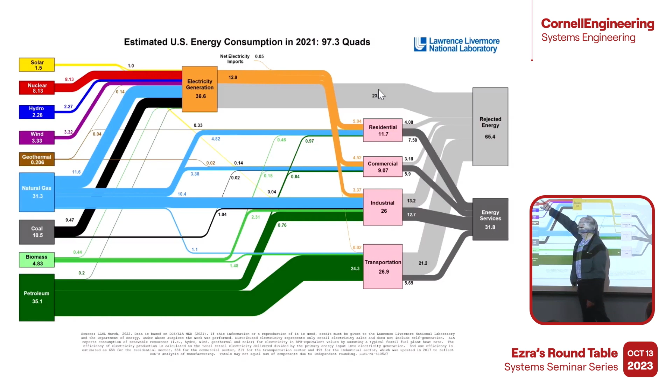These are decarbonized energy sources: solar, nuclear, hydro, wind, geothermal. These are carbon intensive, with coal and petroleum being the most carbon intensive energy forms. This is where energy is used on the right-hand side: transportation, industry, commercial, residential. These are energy services that are useful. This is rejected energy. And you can see the comparison. 2/3 roughly of all energy is rejected.

Why? Because we have coal and natural gas-fired power plants that put out an enormous amount of heat to the atmosphere. And then we have internal combustion engines in transportation that put out enormous amounts of energy to the environment. So in terms of decarbonization of transportation, I'll draw your attention to this little thing here, the 0.02, which is the electrical energy generation that's used in transportation.

What we have to do is we have to take this number and make it match that number. We have to increase that number to that point there, right? Not only that, but we can't have any of that power coming from natural gas or coal. It has to come from these 5 here, right? Decarbonized power. Geothermal is small and emerging.

Nuclear, we're not going to permit another nuclear plant. It takes 25 years to do so. Hydro, we're not going to build another large dam in the United States for environmental reasons. So it has to come from wind and solar. So wind and solar need to increase in order to match this number at a bare minimum. That's the decarbonization challenge that faces transportation and the decarbonization challenge that faces our country.

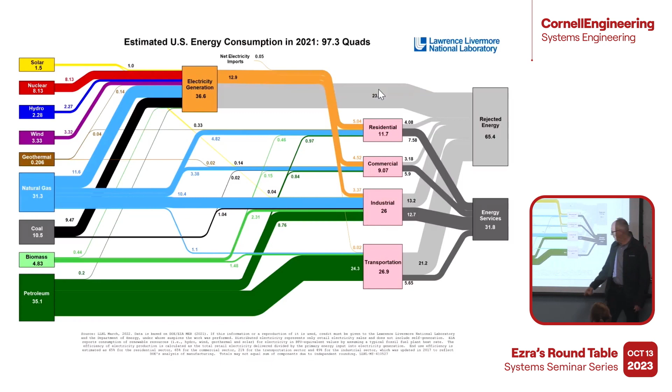Are you beginning to see the scale and the scope of this transformation that's hitting us? Then I glibly said wind and solar, right? Wind and solar are intermittent, whereas our use of power here is not intermittent. We drive all hours of the day and night. So we're going to need grid level storage.

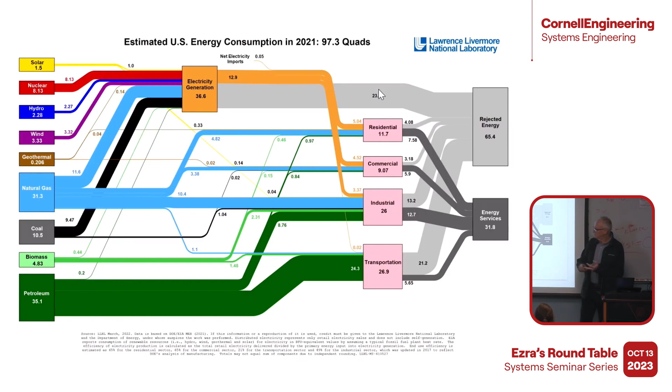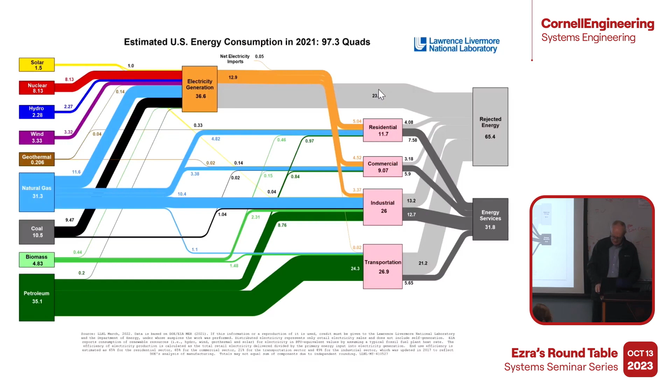So we need increase in renewable energy generation, increase in grid level storage, increase in transmission and distribution, increase in recharging. And then of course we need to produce the vehicles themselves and the batteries that power them. And then we need to make sure that people implement these. So we need to provide incentives for people to purchase. And I'll talk more about that in a while.

But our road transportation reality in the United States: light duty is LD, medium duty MD, heavy duty HD. We collectively drive in the United States 101,000 miles per second, 24 hours a day, 365 days a year. Fuel consumption: a large gasoline tanker that you see refueling a gas station, one of those every 1.5 seconds of every hour of every day of the year.

Number of vehicles in the United States, 270 million of them. They average about 12 years old for light duty. We used to sell about 17 million new light duty vehicles a year. It dropped significantly in the pandemic. It's climbing back up to there. Heavy duty sales are half a million or so. Average new light duty vehicle price in 2023 is $48,000.

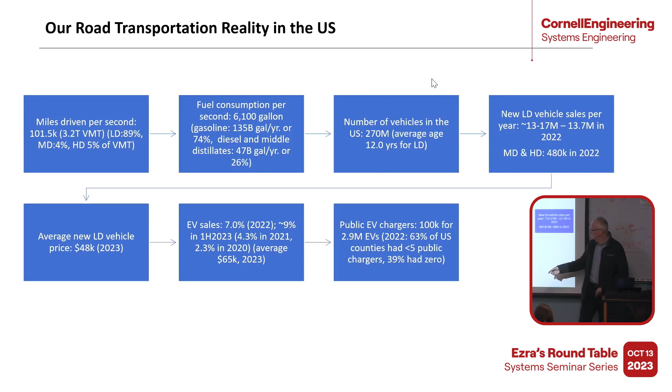EV sales are 7.9%. I said of the order of 9%, it's 7.9% so far this year. The average EV price is substantially higher than the average new light duty vehicle price, by $17,000 or so. 39% of US counties have 0 public chargers for EVs, which means that people charge them themselves in their own garages or in private charging. But this is a significant impediment to the rollout of vehicles.

So, by 2050, the vast majority of the light duty automotive fleet, and by light duty we mean passenger cars, SUVs, light trucks, minivans, the sorts of things that you and I drive around in, and the vast majority of those are privately owned, will be electrified if we've resolved the issues of critical materials and minerals. I'll talk more about that in a while. If the grid is essentially decarbonized through renewables, if vehicle purchase costs have been reduced, and if EV charging opportunities are ubiquitous, meaning you can charge at home, but if you go beyond the normal vehicle range on your EV, you need to be able to find recharging capabilities.

This is just another graphic which says exactly the same thing, but it stresses the fact that we need to resolve these things simultaneously. Significant build-out of renewable energy, significant build-out of the grid. And by the grid, we mean the first 1,000 miles, so the very large, high-voltage towers that you see with lines strung between them, and the last 100 feet, meaning if you live in a house or a dorm or a building such as this, they might need to add electrical power capability in order to improve the capability to charge EVs.

Critical materials and components. And those are battery materials, things like lithium, cobalt, graphite, manganese, nickel, a number of others. Rare earths, which are used for electric machines, specifically things like permanent magnets and so on. And then still semiconductors. And those are both for microprocessors, but also for switching for power, both at the millivolt level for your laptop, but also at the thousands of volt level for the grid.

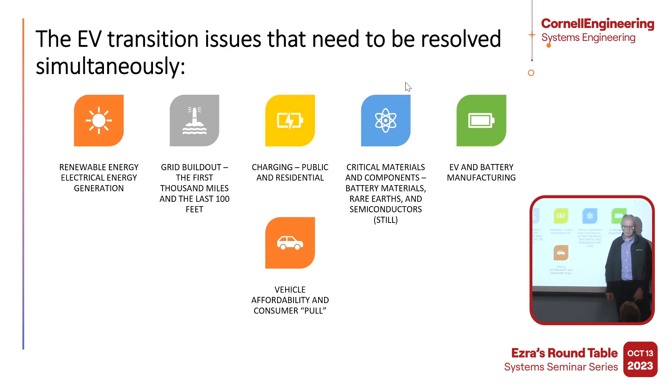We're doing an absolutely terrible job of that. We're doing a not very good job of that. We haven't really started that. We haven't really started that. And then this, vehicle affordability, is a significant problem too. And this pretty much says in words what I've just shown, but for transportation electrification, we need a 3x, 3 times increase in the current solar and wind capability. And that's before we decarbonize industry and before we decarbonize residential heating and cooling, for example.

So you've heard a lot about the proliferation of heat pumps for heating and cooling. A remarkable technology, very efficient, coefficient of performance of 3.5, which means for every 1 unit of electrical energy you put in, you get the benefits of 3.5 units of heating or cooling. A remarkable technology. But before we can do that and electrify, take away someone's natural gas fired furnace, for example, we will need to increase renewable energy generation.

And a near doubling of the existing high voltage grid, and a 100 times increase in EV charging, 100x increase in EV charging for light duty, medium duty, and heavy duty. We need a complete transformation of the automotive industry, and this is underway. A complete revamp of critical materials supply. That's problematic. We can source lithium in the United States. There's lithium in geothermal brines. There's a big lithium deposit we found on the border of Nevada and Oregon.

But none of that beneficiation, taking the raw ore and producing lithium carbonate or lithium hydroxide for lithium batteries, none of that takes place in the United States. And it would be very difficult to permit in the United States. Why? Because they are, by their very definition, dirty processes.

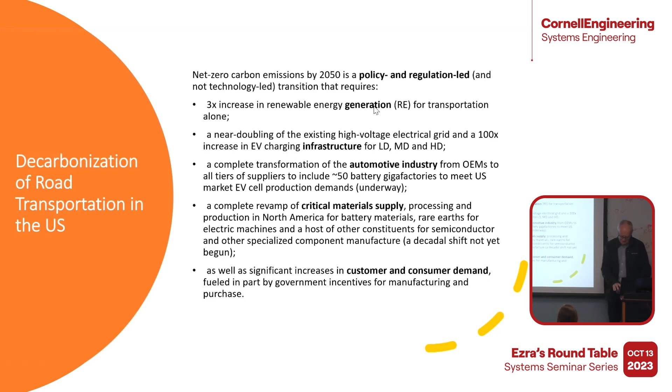As well as we need significant increases in customer and consumer demand. This is something that we can't understress. We're talking about mechanisms and systems and technologies and processes and procedures and materials, but there's humans involved, right? And we need to keep thinking of that, human factors and human behavior. Each of these 5 revolutions is underway, proceeding at different rates, different levels of finance required.

Basically, the bottom line is we're at the beginning of a decades-long transition with respect to the electrification of the automotive fleet and the electrification of transportation. And it's highly uncertain in nature, and it's going to cost us trillions of dollars, trillions, meaning thousands of billions of dollars in the aggregate.

To electrify all vehicle miles traveled in the United States would add about 43% to US annual electrical energy demand, right? It's doable, but again, this is a graphic representation of the challenge. It cannot come from petroleum, it cannot come from natural gas, it cannot come from coal, it cannot come from nuclear, and it cannot come from hydro. It has to come from that. So that area has to expand to 100% of available energy requirements in the United States. You're beginning to see the challenge of this transformation. That's just on the energy production or generation side of things.

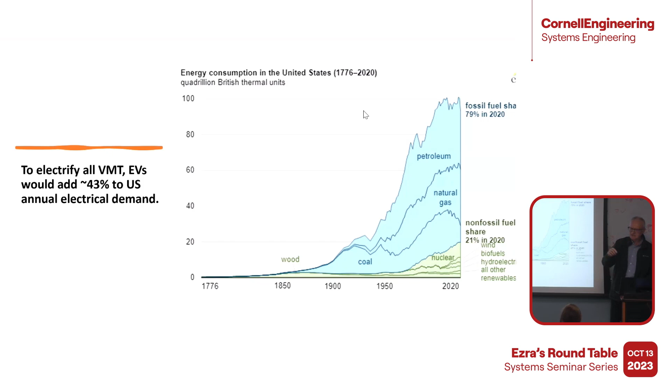In 2018, 2019, a complete irony is we achieved energy independence in the United States. We've been fighting for it for 70 years or so. We achieved it. And virtually at the time that we achieved it, we decided to jump architectures of vehicles away from fossil fuel driven vehicles to electric vehicles.

Now the beauty of using electrical energy as your energy source is that by definition, because we are a continent essentially, the United States, we'd be largely free from imports. Although bear in mind, we do import natural gas and petroleum from both Canada and Mexico. There's flows back and forth across the boundaries. But if you're going to use electrical energy, that sort of by definition means that you're producing your own power along the way. But again, there's this notion of trading energy independence for complete dependence on others for critical materials, the critical materials that are required to undertake this transition.

New vehicle economics. We used to sell about 17 million vehicles a year. This dates back to 2014 or so. Then we had the pandemic, a significant drop to a little over 8 million on an annualized basis by quarter. And we're now up to 13 or 14 million, right? We haven't recovered to 17 million. Why? Affordability is an issue. And then there's the availability, as you know, of semiconductors.

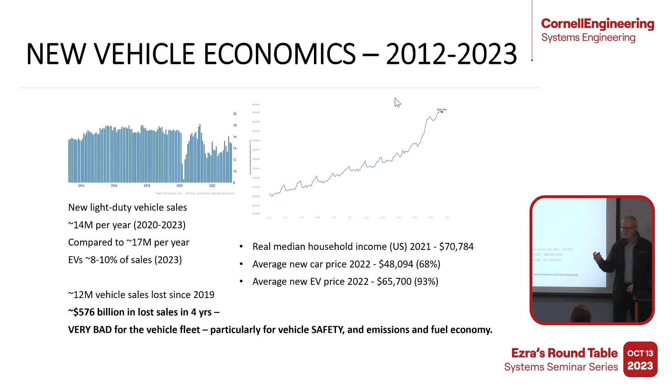So in other words, the vehicle fleet, if you differentiate it into a bimodal of horrible old vehicles and beautiful new vehicles that are very expensive, on average, the vehicle fleet becomes less safe, higher emitting, and less fuel efficient. And none of those things are good.

Now, in terms of the critical materials, this is from the International Energy Agency, and this is a sustainable development scenario of 2040 compared to 2020. This is actually outdated. It's 2021. It's 2 years old, but it doesn't matter. For the purposes of what I'm about to say, it describes it. And it says, for example, for lithium, we need to increase both lithium mining and lithium production by a factor of 42. 42.

Graphite, why? Because graphite is used extensively in batteries, by a factor of 25, cobalt by 21, nickel by 19, rare earths by a factor of 7. These are multiples of 7. We need to scale up our mining industry today, our extraction industries today, and the beneficiation or processing of those raw materials by these factors for these critical materials.

And why are these the ones that are chosen? Because these are the ones that are required for electrification. Lithium, graphite, cobalt, and nickel in batteries, rare earths in electrical machines, generators and motors and actuators and so on. These are the levels at which we need to increase this, right? And the idea is this is 2040 relative to 2020, within 20 years. So these are staggering amounts.

Bear in mind further that mining, we collectively, as a very developed nation, we've avoided mining. We've given that job to other people to do. We haven't wanted to do it. It's a dirty business. Literally, it's a dirty business. And we've stepped away from it. Now we have to re-embrace it, right? So things are going to change. Things are going to change radically.

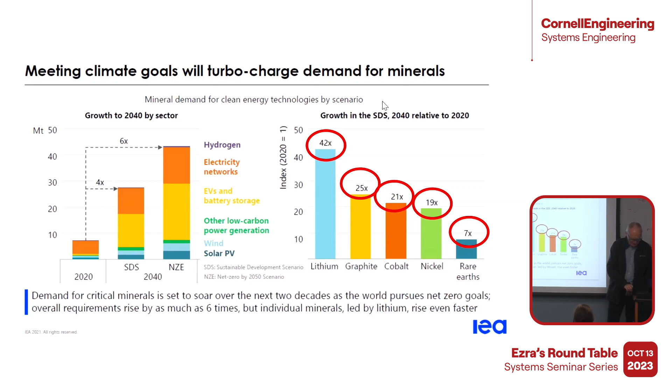Battery pack costs: the idea was that battery pack costs would just decrease significantly over time. And this is dollars per kilowatt hour at the pack level, 2022. And unfortunately, you can see what people predicted, which is that they would go to $50 per kilowatt hour at the pack level. No, there's been a reversal. Costs have actually increased in recent years. And a lot of that has to do with the costs of the underlying fundamental raw materials. So the lithium, the cobalt, the nickel, the manganese, and so on.

Right. So 100 kilowatt hour, which is a large battery pack for a light duty vehicle, but that's $15,000. And that's just the raw cost of it. In a $65,000 vehicle, that's 25% of the cost merely going into the battery alone.

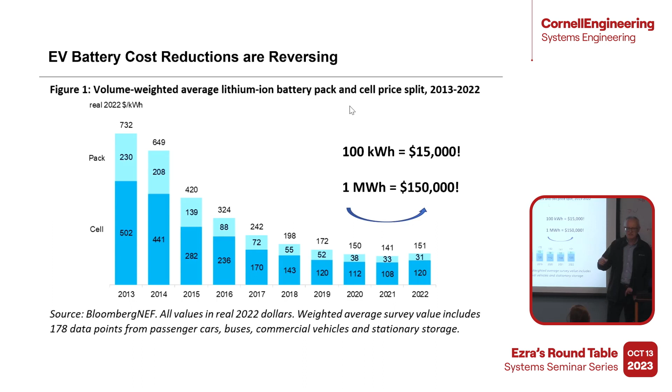Significant issues. Refueling or recharging rates, you might have seen this before, but a light duty car, when you fill it up at the gasoline pump, 10 gallons a minute, it gives you 300 miles per minute of recharging capability, right? Level 2 charging at your home is 0.35 miles per minute. So it's a factor of 1,000 difference.

A heavy duty truck, when it pulls up to a truck stop and they put in the big filler, it's 180 miles per minute. An EV truck charging at 1 megawatt would be 5.5 miles per minute, right? As you know, heavy duty trucks, when they're not moving, they don't earn money. And that's what heavy duty trucks are supposed to do for our economy.

It's provide things we need, but also make money for the people operating them. And so that's a tremendous worry. And that's a 1 megawatt charger, right? So how many of you have owned or drive or have operated an EV? I know that Ricardo does.

Okay, but you're talking about a cable thicker than your arm for this 1 megawatt recharger on a heavy duty truck. And you've all driven on the interstate and seen a truck stop where there's been 50 or 100 or 200 or 300 trucks. Just think of those, or a truck stop, a rest area. Think of 300 trucks a night having to charge at a megawatt apiece. This is the scale and scope of the transformation.

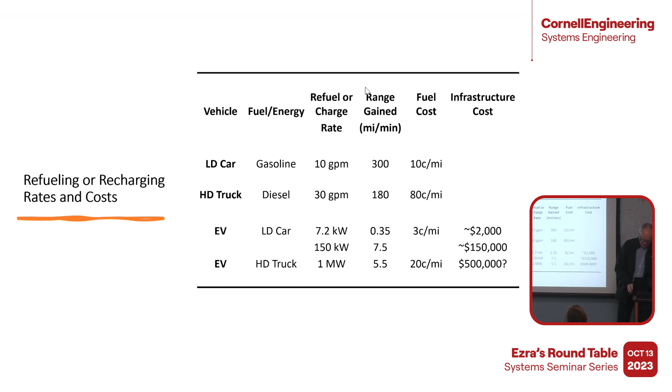Government interventions. I spoke of the sort of technology push, if you like, but there's a consumer pull. And we're doing a pretty good job of that. There's tax rebates for light duty vehicles, there's incentive to manufacturers, there's a much higher awareness of the critical materials and minerals supply chain problems in the US. There's a lot of reshoring of manufacturing and the reindustrialization of the United States. We need to move higher up the critical materials chain. As I said, we need to mine our own lithium and upgrade it and beneficiate it within the United States.

From a critical economic security point of view, we're funding the electric charging build-out. There's the US Department of Energy, US Department of Transportation Joint Office on Energy in Transportation. And they're doing things like, what is the optimum siting of recharging systems within a certain geographic area? We need standards. Why? Because industry loves standards, and that's in charging, that's in V2X communications, for example. And what about automation? I haven't spoken much about automation, except to say it's happening at pace, and it's a very, very difficult area, especially in the notion of a mixed vehicle fleet of humans and automated vehicles combined.

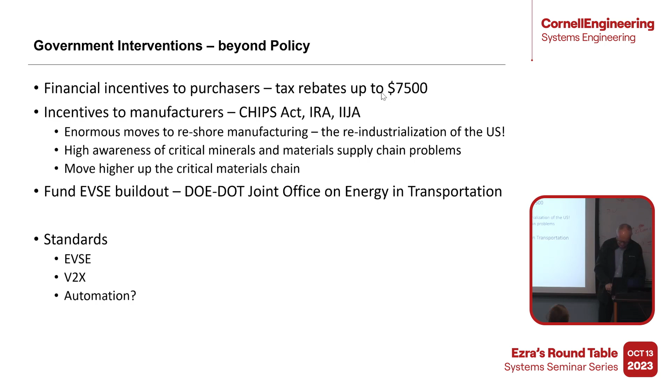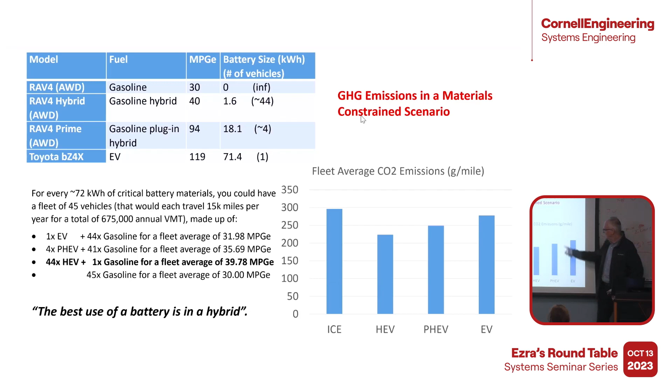Now, greenhouse gas emissions in a material constraint scenario. We are material constrained. Why? Because we can't scale up lithium production by a factor of 42, not easily. So it just turns out that if you think of an internal combustion engine vehicle, a hybrid electric vehicle, by which you mean a strong hybrid, much like the original Prius, for example, a plug-in hybrid which carries a battery pack as well, where the hybrid does not carry a battery pack, and then a full EV. The fleet average CO2 emissions in terms of gram per mile, based on the current United States power plant emissions as they exist today, the lowest greenhouse gas emissions, CO2 emissions, are not the EV, and they're certainly not the internal combustion engine vehicle, but they are a hybrid, and it's a regular hybrid. It's not a plug-in hybrid.

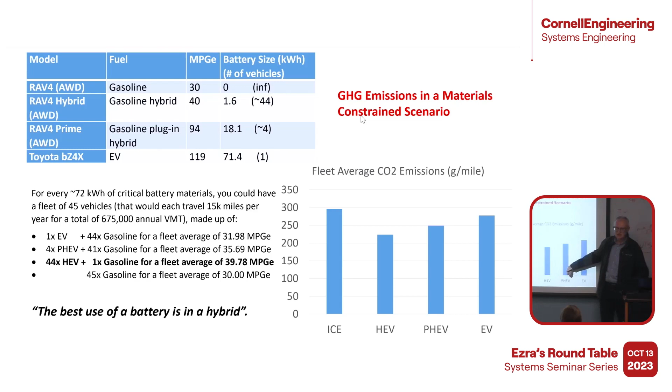So if we're truly worried about what if we had an incremental 1 ton, for example, of lithium, and you say to yourself, where should we spend that 1 ton in order to reduce our CO2 emissions? It's not in EVs, it's in hybrid electric vehicles. Now, at the point at which we're no longer materials constrained, and we have decarbonized the grid, and we have grid build out of the transmission and distribution, then of course we want to build these. But there is a transition that we've ignored. There is a transition that we should have undertaken that we've essentially ignored.

Again, I said to you early on, electrification, automation, and something else, connectivity. Can't remember what I said. I said those aren't the most important. The most important is safety. Right? Roughly 43,000 fatalities a year in the United States. That's both a scandal and a tragedy, and something that we collectively should do something about. You can see the number of fatalities. These are in recent years, and on the right-hand side, it's fatalities per 100 million miles traveled. I beg your pardon. And it's roughly 1.4 fatalities per 100 million miles traveled.

Now, admittedly, why is that? Because these are human drivers, by and large, and humans are both incredibly good drivers, I mean, look at Formula One drivers, for example, and they're incredibly bad drivers. I was telling everyone, I walked from the Statler Hotel down to Hollister Hall this morning, and someone drove through a red light, right? Happens all the time. You have to have your wits about you as a pedestrian. But these are things that are readily avoidable and shouldn't happen. These things simply should not happen. So it's human behavior and human factors that we have to take into account. And again, with respect to vehicle automation, we're going to have a mixed vehicle fleet.

We're going to have human drivers, we're going to have pedestrians on the roads, we're going to have cyclists on the roads, and we're going to have automated vehicles. And all of these issues have to be solved and resolved. But again, I wanted to draw your attention to the fact that these numbers are scandalous, and they're going to persist because we're going to have human drivers for the next 30 years. And this is something that we collectively should do something about.

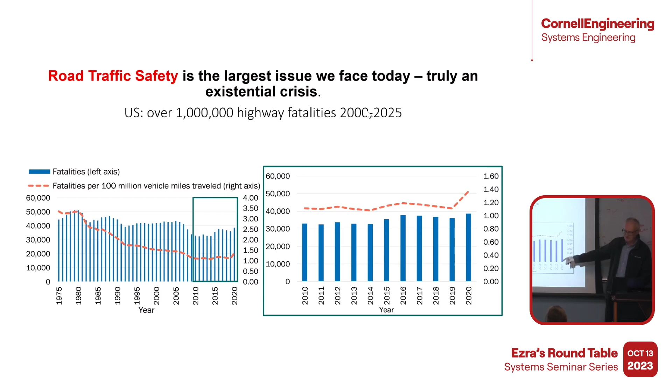I just picked up some pictures here. This is the Cruise vehicle that rear-ended a bus in San Francisco recently, and this is another Cruise vehicle where a truck was making a sharp left-hand turn and it simply drove into the side of it. So I'm not saying that humans don't do these. Humans do these sorts of things all day, every day. But it's just emblematic that automation is currently not a well-resolved issue and will remain difficult and intractable for some period of time to come.

It doesn't mean that people should stop working on it. To the contrary, you should double down your efforts. But you should bear in mind that it is a significant and serious issue. It's something that needs to be resolved.

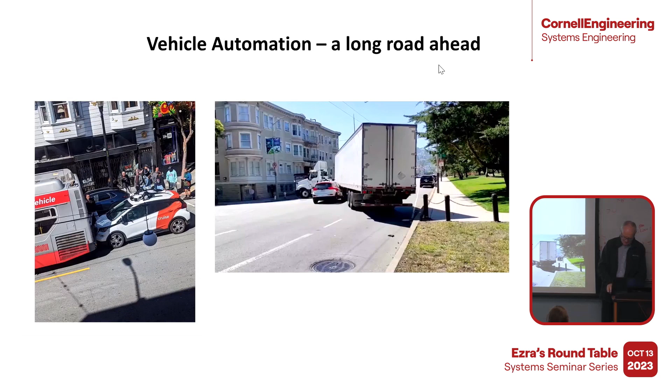Professor Malikopoulos spoke of the ARPA-E NEXTCAR program, and I had to include this slide out of pride because the idea there was to use low levels of automation. So there are levels of automation where the driver still needs to keep his or her hands on the wheel at all times, but it can control the vehicle speed, it can control the vehicle braking, and to a certain extent it can control lane keeping.

And the idea is that, well, this is demerging, Andreas. I guess it's not merging. I was going to say it's merging, but it's demerging.

The idea, here's a vehicle, a ghost vehicle that's changing lanes, for example. The idea is that, as Andreas said, you can have significant energy efficiency improvements to a single individual vehicle if you allow the machine to take over the low levels of automation and you get it to drive in a more sensible fashion than a human driver. And by significant, I'm meaning 20 or 30% improvements, which, as you know, are fairly remarkable.

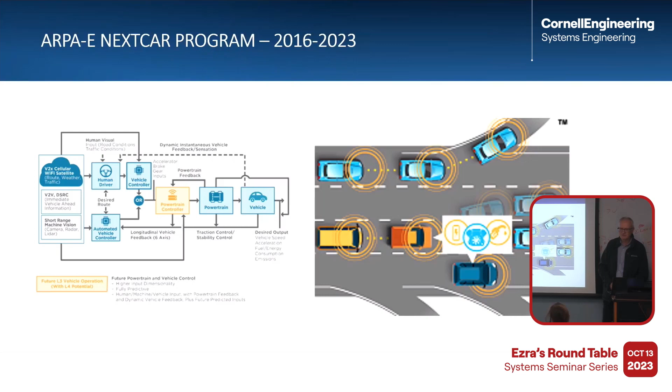Right. Separately, the US Department of Transportation, and I've mentioned to you that roadway safety is a critical issue. 27% of all roadway fatalities in the United States occur at a roadway intersection, right? And that's both signalized, meaning it has traffic lights and traffic signals, and non-signalized intersections. So of the 43,000 fatalities I spoke of earlier in 2021, roughly 10,000 of those occurred at intersections. And it's a combination of drivers and passengers in vehicles, but also pedestrians and cyclists, people pushing strollers, people in wheelchairs, and so on.

And so it occurred to the US Department of Transportation to say, look, if we have automated vehicles today that are driving the streets of San Francisco and Chandler, Arizona, and they use machine vision and perception with multiple modalities, they use sensor fusion, they use real-time onboard path planning to decide where to drive next, and real-time decision making. If we believe collectively as a society that those technologies are good enough for us to allow these vehicles to drive on our streets, and apparently we do believe that,

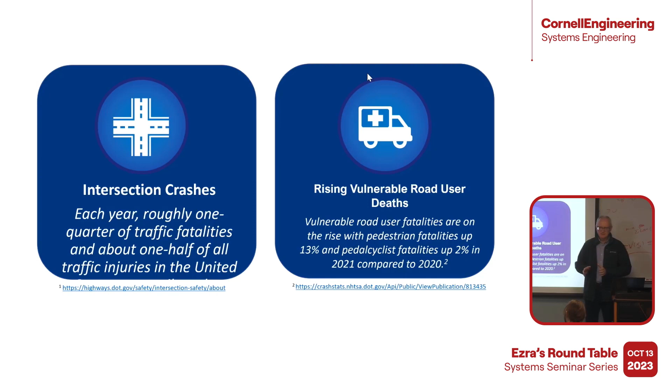then surely we can take those same technologies out of the vehicle and put them in an intersection and look down on an intersection, determine where the cars are traveling in real time, determine where the pedestrians are traveling in real time. I want to get a picture. There we go. Determine where the vehicles are moving in real time, determine where the pedestrians are walking in real time, and then alert them, respectively, if a collision or an incident is about to occur.

And that's the idea behind the US DOT intersection safety system, is to use emerging low-cost machine vision sensors, sensor fusion, real-time data analytics to improve situational awareness and to anticipate safety threats. The idea, therefore, is to go one step beyond that and to alert people in real time that a potential incident may occur.

And again, why am I bringing this to your attention? Because it combines the notions of automation. To a certain extent, it introduces the notion of efficiency. Why? Because intersections with traffic stopping and starting are a major source of inefficiency in our driving system. But most importantly, it introduces the notion of safety. And it's something that we can do today. That's the important part. This is not something that will take decades to emerge.

This is something that we can start working on immediately today, and hopefully within 5 to 10 years, come up with one or more commercial systems that can be implemented in intersections to drop that number significantly, the 10,000 fatalities, drop it significantly. Why? Because again, it's an imperative that we do something. We can't simply say in 50 years we'll have a fully automated traffic system, pedestrians will be removed from roads, human drivers will be removed, everything will be safe and wonderful. No, we need to do something today.

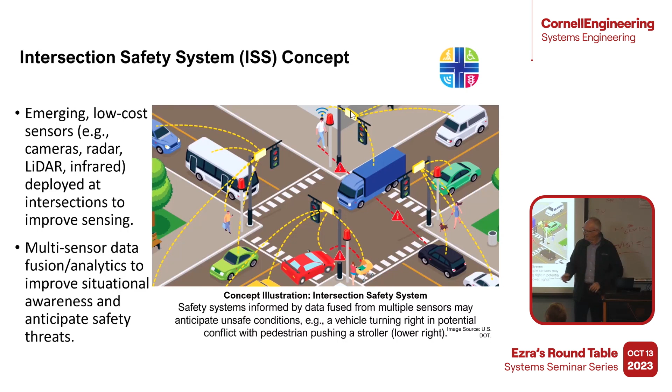And this is an attempt to do that. It's a technology-based approach. There's a prize competition. The stage 1A closed recently, but there'll be provision for people to join the second stage, which will probably kick off next year.

And the second stage is developing, training, and improving algorithms for the detection, localization, and classification of vulnerable road users. A vulnerable road user is a pedestrian, a cyclist, a person in a wheelchair, a person on an e-scooter, skateboard, people pushing a stroller, so on and so forth, using DOT-supplied sensor data collected at a controlled intersection. And it's currently a $6 million prize-based challenge.

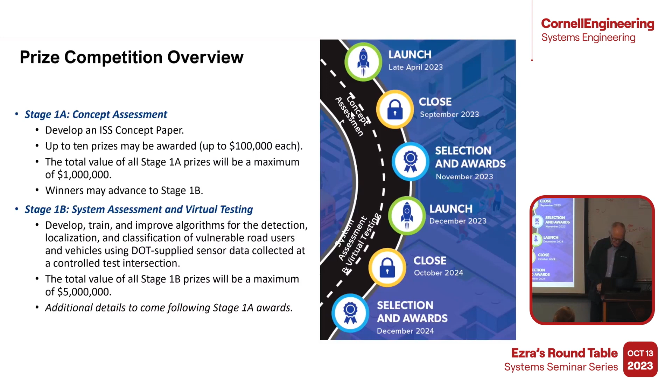And I mention it to you because Professor Malikopoulos spoke of the ARPA-E NEXTCAR, which I worked on a number of years ago. And this sort of is a progression of that, but distinctly with a safety flavor. The concept is something like this. There's machine vision, there's onboard computation with trajectory prediction or estimation, there's sensor fusion, data analysis, logic and real-time decision making, and then there's warning systems. And the other methods is really code for artificial intelligence and machine learning capability.

One thing I need to draw your attention to is we can't rely on the fact that all people carry a smartphone at all times, or that all vehicles will be connected. So it needs to be effective for people who are not carrying devices and for vehicles that are not connected. It has to be essentially backwardly compatible, if you like. There we are.

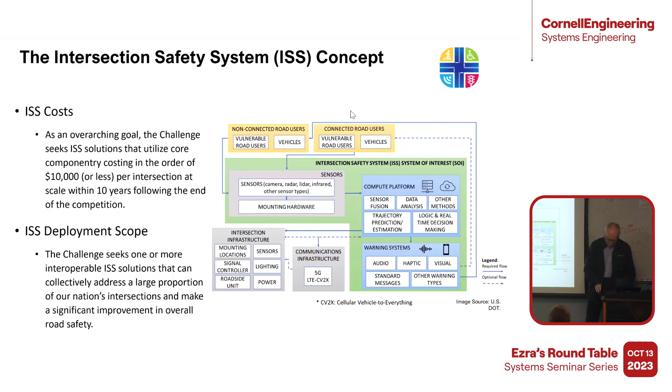So, a summary. Electrification for light duty is well underway, but significant issues remain with regard to costs and affordability, critical materials, charging infrastructure, grid decarbonization, policies and regulations. We've traded energy independence, which we achieved for a fleeting moment, for a complete dependence on imported critical materials. Vehicle automation is proceeding, but a very, very difficult technical issue. Those of you working on it, I think, understand that deeply. And then again, our greatest problem today is with road safety.

And so I want to leave you with the message of don't lose sight of the big picture. The big picture is that we're talking about transportation, automation, connectivity, and it does things like decarbonization and automation, as I say. But you can't lose sight of the bigger picture, which is that safety is our number one consideration when it comes to road transportation.

People also say, well, why is, and our Secretary of Transportation, Secretary Pete Buttigieg, likes to say when he gives a talk at a conference, he says it's scandalous that you were safer flying here to this conference than you were walking across the street to the conference center. And it's true. And you have to say, well, why does that occur?

It occurs for a number of reasons, one of which is that the transportation system is remarkably well controlled. We have an air traffic control system that maintains 90-second separation between aircraft. The aircraft themselves are very well maintained, the pilots are impeccably trained, and in the cockpit, there are no distractions whatsoever. And that combination is what makes the system work in the end.

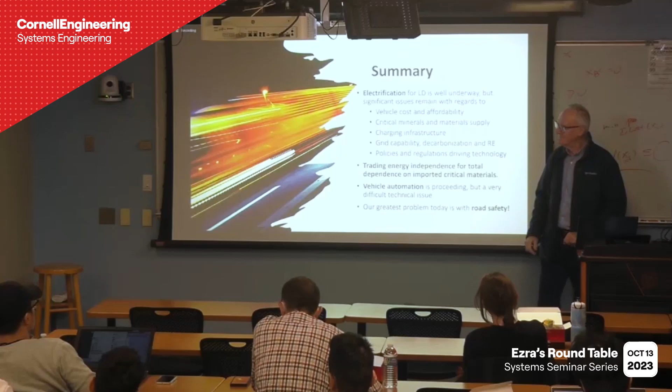I do have a question just to warm up. Sure. So you mentioned on the intersection challenge that there is a vision of several technologies that can be used in an integrated manner so that we can improve safety. Is this call open for any ideas, or do you specifically need to see a component of learning, for example, or specific components in place? Is the goal open to any other ideas?

It's open to any idea. We came up with a concept that we believed people would use. None of that is a requirement, but we believe that it requires machine vision for a start. It's very tough for us to think of a system that would not rely on machine vision.

Now, people can say it can rely on connectivity, and the answer is no, it can't, because it needs to take into account people and vehicles that have no connectivity. So it requires machine vision. If it has machine vision, we believe it probably requires more than one modality. Why? Because you can't get all the information that you need simply from radar, LiDAR, or camera. So therefore, it's going to require some sort of sensor fusion.

It's going to require path planning and prediction of both vehicles and the vulnerable road users. If someone comes up with a system that's entirely logic-free, that'll be very interesting, but we don't think so. And then there's going to need to be real-time decision-making, and then you're going to need to alert both the vehicles and the people in real time.

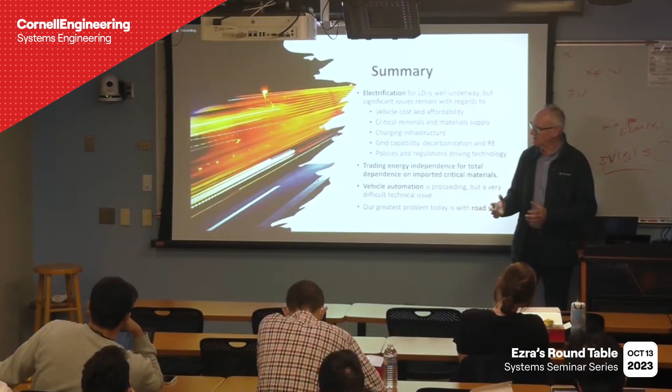And the warnings, are they visual, are they audio? Well, we have to take into account that there are blind people or nearsighted people and deaf people at intersections. So is it haptic? Does the sidewalk vibrate? We're leaving it completely open to people. So we are not specifying technologies, we're specifying outcomes for that.

That's great. And another question related to that, is there any cost constraint? Because I remember in the NEXTCAR we have some sort of cost constraints. There might be an idea to come up with a solution that costs millions of dollars, which might not be really sustainable. Yes, good question. The criteria say that we are seeking lower cost systems. Now, we are not trading off safety for cost.

But one of the reasons why we believe that this is perhaps possible, we don't know that it's possible, but perhaps there's a glimmer of hope that it might be possible to develop a system, is that in automated vehicles, the costs of the sensor suites and the onboard computation have come down by orders of magnitude over the last 10 years or so.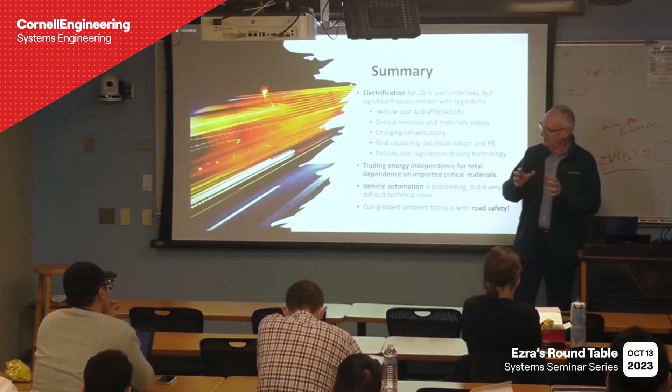And so, again, the idea is to borrow from those technologies significantly, take them out of the mobile vehicle and put them in the fixed domain at an intersection, which we believe is actually an easier problem. Why? Because it is a fixed domain. Your baseline is not moving underneath you. And take advantage of the cost reduction of those technologies, the sensors, the computation, the connectivity, and so on.

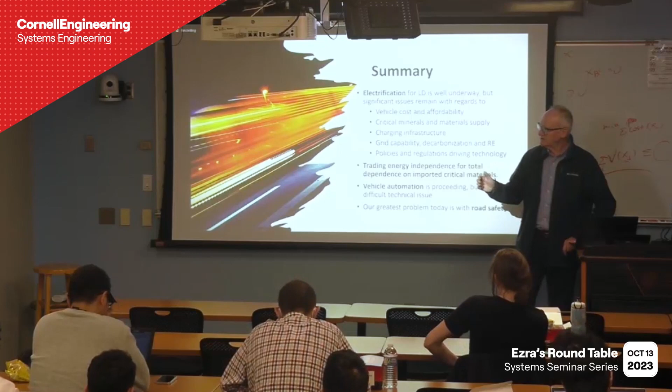So no absolute cost constraint, except that we wish to see costs low enough such that you could, in theory, deploy this at tens of thousands of intersections. That's the idea. And the idea would be to deploy it at the highest risk intersections first and roll it out from there.

Questions? Yes. So your point about the number one problem being road safety, I think that was interesting to me because I had forgotten about that and am mostly thinking about the decarbonization side. But I was curious if you had any numbers on how the two problems compare in magnitude, like the number of traffic fatalities that can be avoided versus if full decarbonization is achieved, and the number of fatalities worldwide with migration and natural disasters and things like that. How do those compare?

Another very good question, and a question that's very high up in our collective minds. The dirty secret, that's not much of a secret, is that climate change is going to affect the most vulnerable in our world first and to the greatest extent. And the rest of us, the people you see in this room and the vast majority of the people in the United States, while things might be inconvenient for us, our lives are not going to be in mortal danger.

That's issue number one. The second is that we shouldn't really be trading off one set of conditions for another. I'm not saying that you stop work on your decarbonization. I'm saying that you bear in mind that there are significant and larger issues at play. To give you an indication, over 40,000 fatalities a year for the last 25 years. That's 1 million people in the United States who've died on our roadways within the last 25 years. If that's not an existential crisis, I don't know what is.

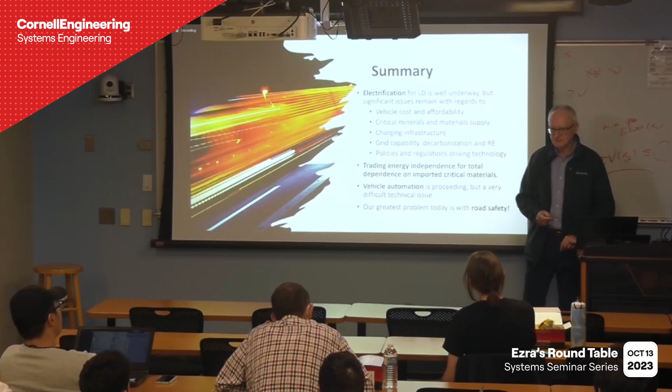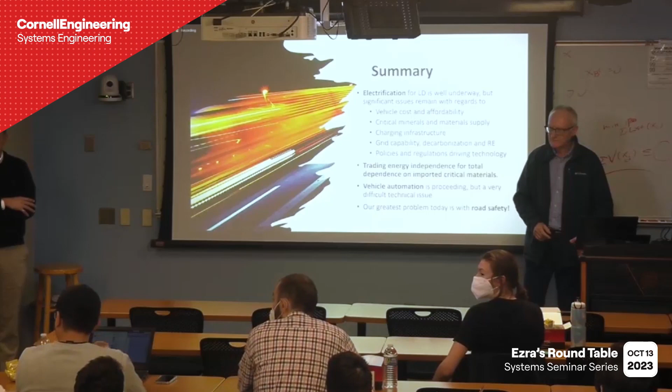Really? Yes. So I remember on one slide, you show the comparison of the greenhouse gas emission across internal combustion all the way to the EV. It seemed like for the battery vehicle, the greenhouse gas emission does not seem to reduce a lot in comparison to the internal combustion vehicle. Yes. Right, here. Two issues.

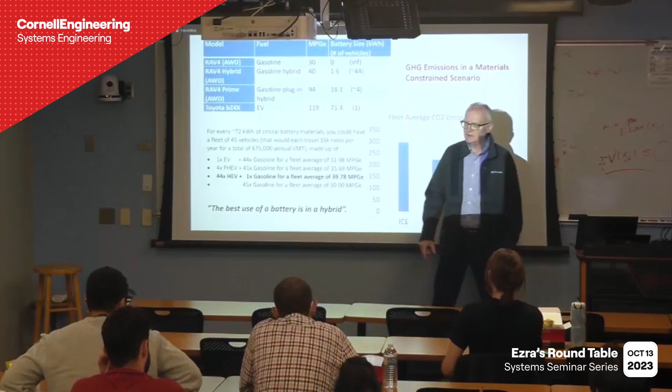One of which is that just for the purposes of this, I used the miles per gallon equivalent that the EPA designates today. So this is the RAV4 all-wheel drive, the RAV4 hybrid, the RAV4 plug-in Prime, and the Toyota bZ4X. Why did I choose those? Because they're essentially the same vehicle with 4 different driveline systems. And these are the miles per gallon gasoline equivalent that the EPA ascribes to each of these. So it's not my numbers. This is the EPA, right?

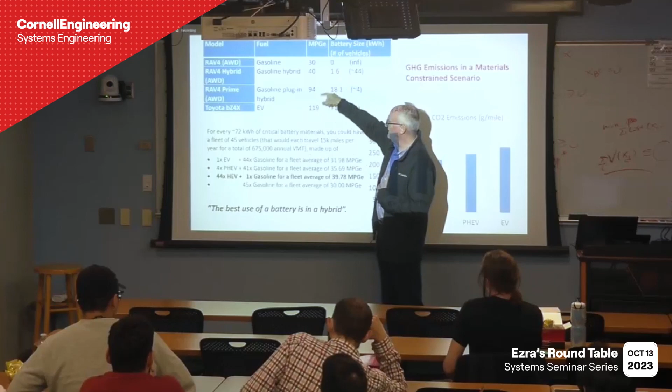Bear in mind, this 119 miles per gallon gasoline equivalent is today's power plant infrastructure. As the power generation is decarbonized, this number will go up significantly, right? Yeah, so with this graph at the bottom right, it's hard for us to justify promoting electrification so hard. It is. That's exactly the message. And the reason is that this number needs to rise significantly.

Now, a second issue to bear in mind is that this is not the total life cycle greenhouse gas emissions. This is simply the fleet average CO2 emissions on a gram per mile basis. When you add in the life cycle costs of producing an electric battery for an EV, this looks far, far worse. So in other words, this looks much, much better.

Again, it's a function of the fact that our grid currently is not significantly decarbonized. So if I'm producing an EV today, I'm using grid power from today. I'm not using grid power in 10 years' time or 20 years' time. I'm using grid power today, and that's reflected in these numbers. So you've raised a very, very good issue.

If we wish to decarbonize, there's two ways in which we can do it. We can decarbonize overnight, and I mean decarbonize the whole of industry and the whole of our economy. Or we can decarbonize in a very, very progressive fashion. Just take those as two extremes.

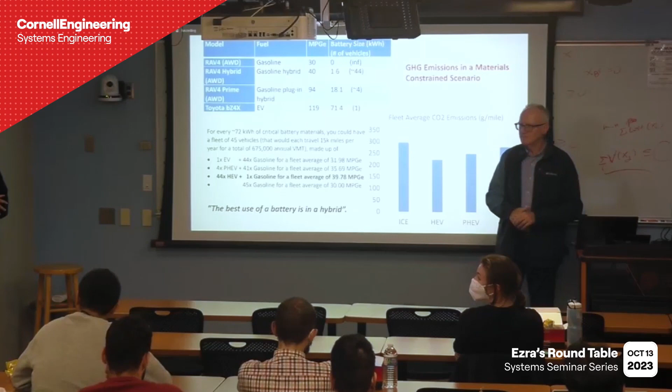That sounds very scary to all of us because you see that last year in the IRA, and also previously in the Infrastructure Act, that has almost $2 trillion. And many people are saying that this is an infrastructure investment many people have never seen in their whole life. Right? And then, however, given this kind of uncertainty and also even this graph here, the IRA has so much money to be invested in charging infrastructure while we are still in the dirty power. How are we going to wisely spend that IRA money? A very good question. Very good question.

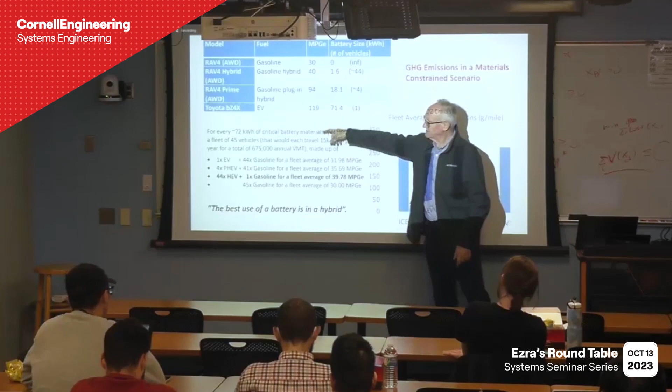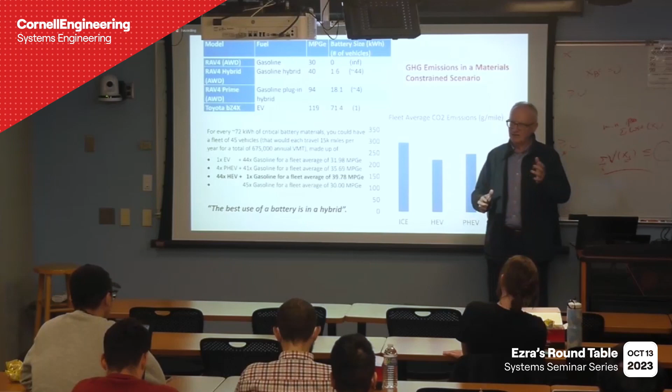Now, there are people who say, ultimately, it doesn't matter because you install the capability today, this number will increase significantly over time, the grid will become increasingly decarbonized, and you will have the infrastructure in place. It gets rid of the chicken and egg problem, which is where people say, I don't want to buy an EV because the recharging infrastructure is not sophisticated. And then people say, well, the recharging infrastructure is not sophisticated because not enough people buy EVs. So you're stuck in this constant loop.

And the IRA is, to a certain extent, an effort to break out of that, to remove that chicken and egg problem. To say, we have the infrastructure, now you people go ahead and buy your EVs. And you'll have certainty that you'll be able to recharge them when you want them, to the extent that you want them, at a reasonable cost, and so on. So yeah, really good question.

The answer I want to leave you with is there's two extremes, and as we well know, because we're engineers and scientists, the optimum always lies somewhere in the middle. But we don't investigate that optimum. We just assume it's one or the other.

Sure. So since you have been in industry, in academia, in the government, and since we have many students in systems engineering here in person or online, any advice based on your experience to all these students? Well, you mentioned system. I didn't use the word system, and I apologize. But obviously, from what I've been saying, this is a highly complex system. Right? As we were just discussing. I mentioned the generation, the transmission, distribution, the end usage, you name it.

It's a system with many moving parts, which is the wrong word. In many cases, they're static parts, but the interactions are not well known and not well understood. And I want to draw your attention to the fact that in the end, as we've just discussed, a lot of it is human behavior and human factors that are quite difficult to take into account and quite difficult to model and manage and control.

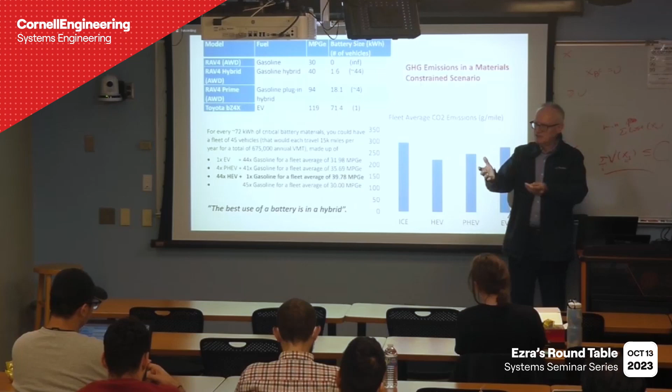My message to you is you're working on the right thing, the right broad area, systems. Everything is systems, and everything is control. Andreas and I are control people, and everything is optimization. I mentioned optimization. Those are the things you should be working on. Now, of course, in order to control a system, you need measurement, decision-making, actuation. Is there something I've forgotten? There's those things that need to be taken into account.

But it's the notion of, can we model the system? Can we understand the underlying dynamics? And then the difficult part is the human factors and the human intervention. And then can we control the system and optimize it? And that's it. I mean, there's nothing more to life, is there? Really? I think that's it. So yeah, you're working in the right area.

Just keep thinking about things like safety, like the future, like this. And again, can't stress it enough, the human factors and human behavior at a multiplicity of scales. That's the other thing. It's not simply your own small part of the picture. You have to understand the full picture too. Given this audience, I feel very optimistic about how we can handle these problems in the future.